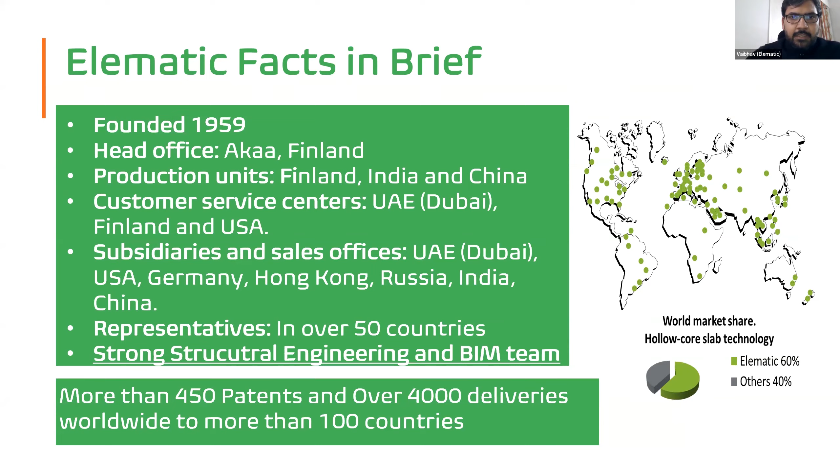So as Elematic, we are not just selling the construction technology, but we are providing the precast solution to the customer, which starts from the building design. Then we are doing the precast plant design, like what kind of precast machinery is required, what area of plant is required, and what kind of stockyard is required. So all this related information in the design we are doing. And then definitely we supply the precast machinery. The machinery can have low automation, mid-size automation, or very high automation as per the customer requirements. So those kinds of precast mold and machinery we supply.

Then we have a team who is also setting up the plant. And after setting up the precast plant, when it is operational, we are also helping the customer further with respect to concrete mix design, precast element production, stockyard management, and installation. So as Elematic in India, we are providing total precast solution, right from concept design till the execution of the project, more of a hand-holding support.

We have a complete project support team, 40 plus people in the design team, who are a combination of structure engineers and BIM professionals. They are doing a lot of precast building design and other design as well, where it is a combination of precast, cast in situ or steel structure. Then we have our service engineers team, and we also have our plant that is based in Alwar, from where we are doing all the mold supply from India. So all the molds for column, beam, and tables and other kinds of molds for precast elements are all manufactured in India.

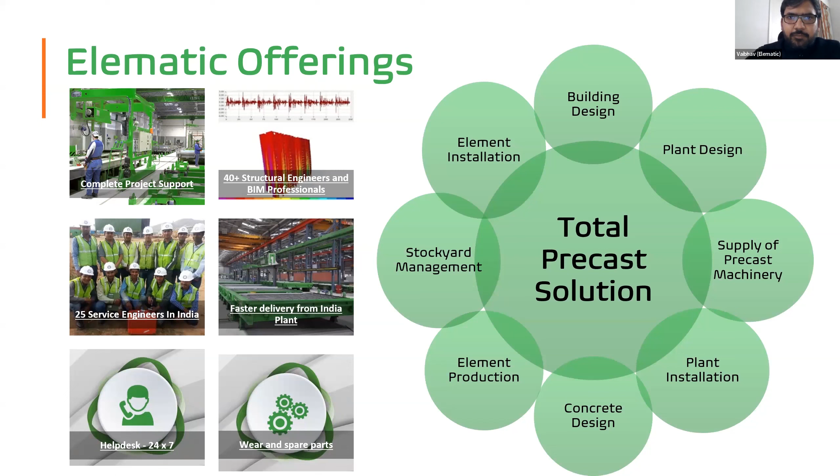So in India, we have engineering and BIM offices in Gurgaon, Pune, and Hyderabad. In Gurgaon we have the office; in Pune and Hyderabad, we have a team who are working from home. So we have presence of the design team in these 3 locations. Marketing presence as well in Delhi, Bangalore, and Hyderabad, and that way we are able to cover across India. The plant is based in Alwar, Rajasthan. And our service team and supervision team is stationed in Delhi and Pune.

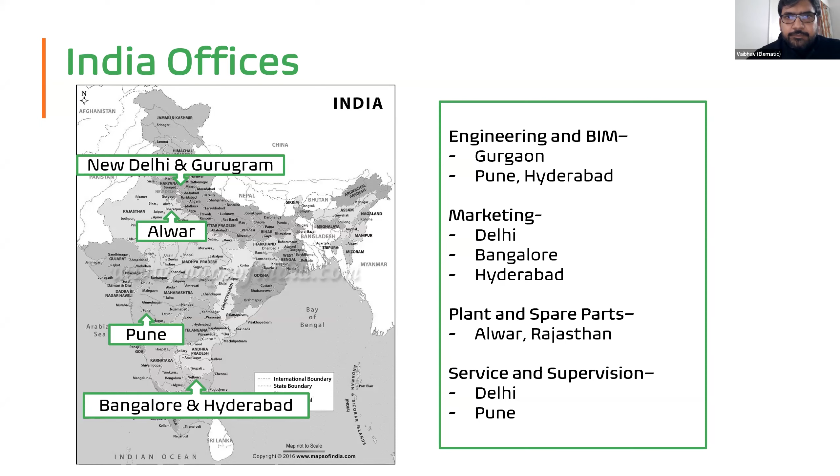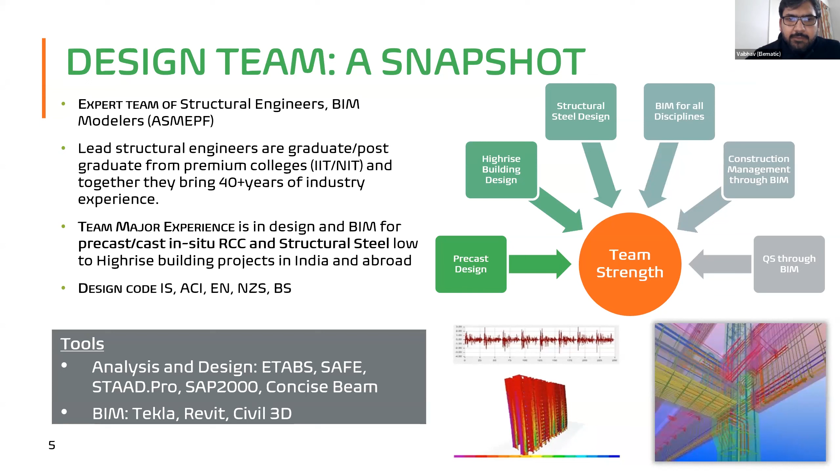So as a design team, the strength: for any building to be a good design, to adopt the technology in the right way, it is important to have a strong structural engineering team behind it. Our design team, who are mainly lead structural engineers, are all graduates and postgraduates from premium colleges like IIT. Together we bring 40 plus years of industry experience, especially in precast. That's how we are able to serve the customer. Our team is doing Indian projects as well as overseas assignments, and we are all equipped with the latest technology and software licenses.

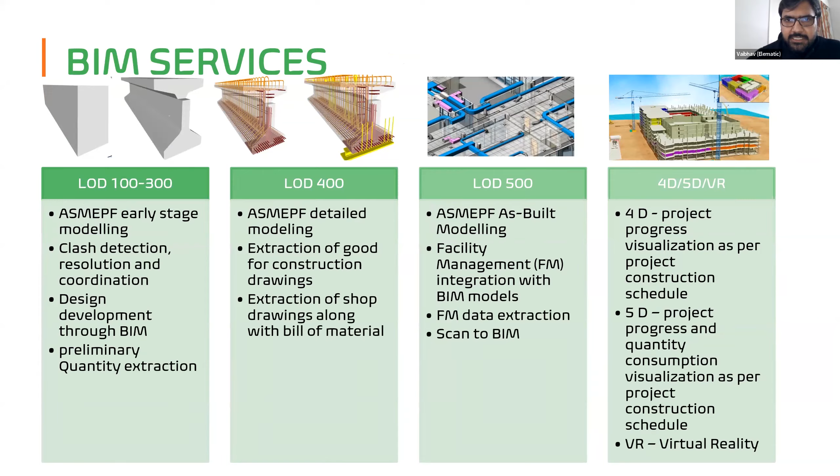So we are doing precast design services and BIM services. Other than precast, we also provide BIM services for the project. So that was a brief about the company, what we are doing and how we can support our customer. I'll come to the precast solution that is available and how anybody can adopt precast for the project.

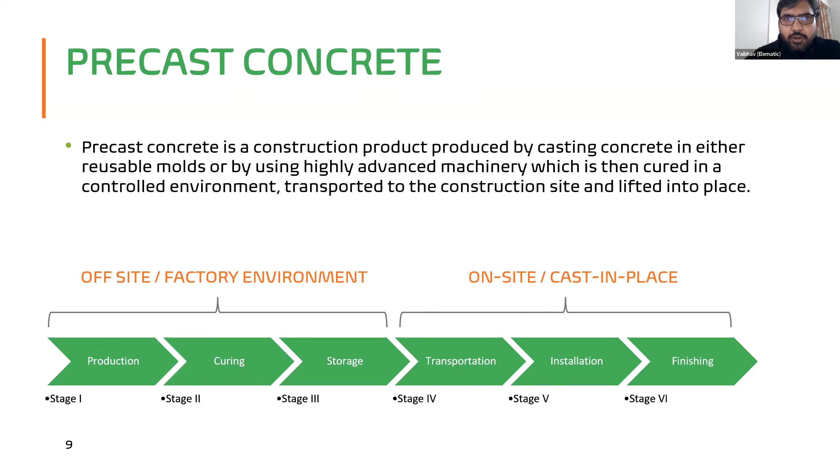So let's understand precast concrete. Precast is offsite manufacturing. Broadly, we can divide this activity in two ways: one is offsite, the other is onsite. In offsite, we are producing all the elements for the building. These are all load-bearing members: column, beam, slab, staircase, wall, all produced in the offsite setup, that is your precast plant. You're producing those elements there, curing them there itself and storing them for some time. Afterwards, you're transporting those elements to the site, the installation is done through cranes, and then the building is finished. So these 6 stages are involved in precast construction.

Now, typically this question always comes to mind: are there any limitations with respect to precast? I would say there are no limitations in terms of what kind of project it is, whether it is residential, commercial or industrial, mid-rise, high-rise, or public works. We have been seeing this for more than 10 years now in all the metro projects, where it's already being utilized. So precast has no limitation. It's all about what kind of plant setup and capacity you have, what crane capacity you have at site, and the logistics part. As long as these 3 things are taken care of, you can do practically any building with precast, because in terms of engineering, we can design any building with precast. All the connections can be designed accordingly, and any project can be done with this technology.

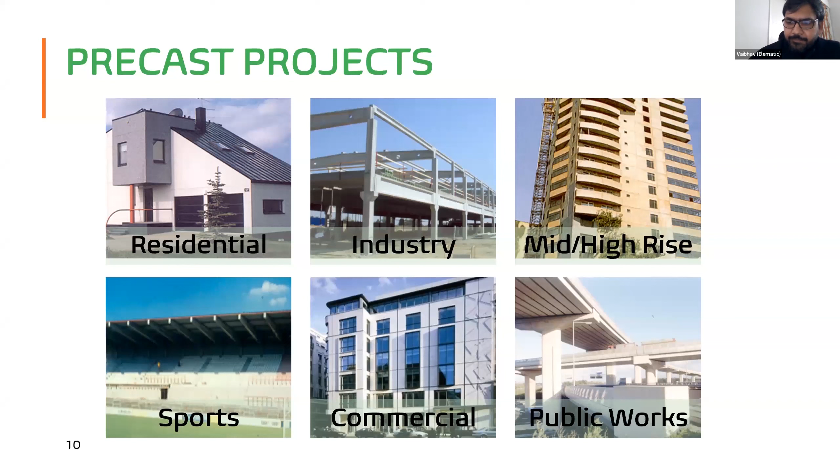So moving forward, if we divide projects, we can simply say there are residential and non-residential projects. We make this differentiation because in residential projects there are a lot of walls, a lot of infill walls. That's what makes them a different type of design solution, because we want to take advantage of those walls as load-bearing members. Rather than going with a column-beam-slab system, we can make the same infill walls load-bearing members, and at the same time they also act as partitions. So in all residential projects, the suitable precast system is load-bearing precast walls, precast slabs, and staircases. Mainly, you only need these 3 elements to do a residential building in precast.

And the facade of the residential building, that is also one of the characteristics of a residential building: you have to have a facade which doesn't require too much maintenance over a period of time, because after 5 or 6 years, you see conventionally in some projects that plaster is falling off, or some kind of paint has gone bad. So you have to repaint, you have to do a lot of repair work. So these facade elements can be done as an inherent part of the precast element.

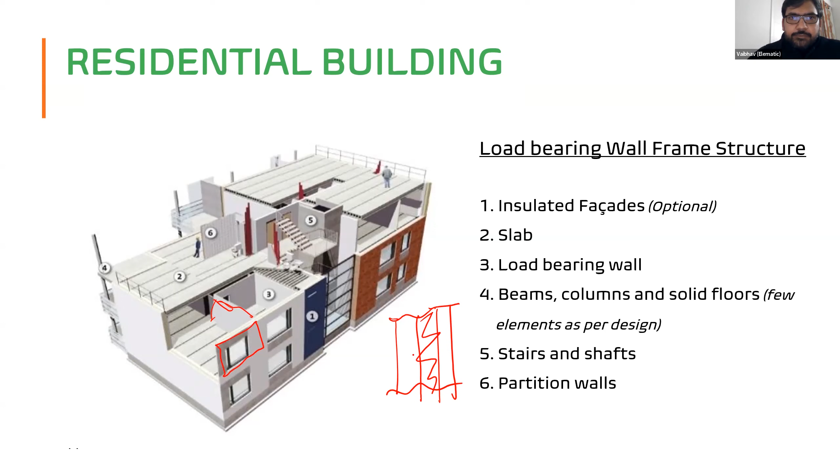One more point with respect to residential buildings: especially in areas where there is a lot of temperature variation throughout the year and you want to maintain a comfortable temperature inside the house, with precast you can also have insulated walls in the facade, with a load-bearing wall on the inside, then some insulation, and then a facade element outside. We call this a sandwich wall panel, which can also be implemented in residential projects. That will define energy-saving homes, where you are able to maintain a good temperature inside the apartment while outside it can be higher or lower. So that was about residential.

Now, non-residential buildings are about column-beam structures. If I talk about an office building, you see that typically the column-to-column span varies from around 8 meters to probably 11 meters or more. That is the trend in all commercial and office buildings. So for this kind of architectural requirement, we go with the precast column, beam and slab system, where one solution is that I can provide the lateral support against earthquake and wind forces through the central core, or wherever I have walls available. Generally in a commercial building, you will have a lift core and staircase core walls, and those walls will take care of all the lateral load resistance for the building.

And I can design my column-beam system where the column is precast, the beam can be precast pre-stressed, and then I can have the hollow core slab again spanning 8 to 11 meters or more as per the project requirement. So the slab, beam and column system would be purely designed for gravity load transfer. And for lateral load, I am able to take care of 100% of the lateral load by the central core or by all the shear walls available in the project. So structurally speaking, in terms of how the flow of forces happens, on top of the hollow core slab we'll have RCC topping.

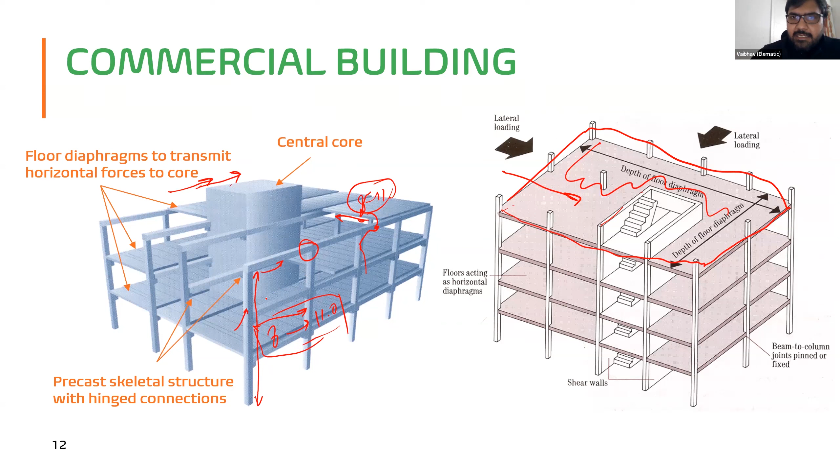precast buildings. So in case of a commercial building, this is the solution we can go with: a precast column, beam, hollow core slab, and the central core, or wherever the shear walls are available. Now, when the building is low rise, I can even have a multi-story precast column, and that will further speed up construction. So those kinds of things are taken care of as a project-specific scenario.

Now, another type of building, other than residential, non-residential, we can say industrial buildings. There has been a lot of demand for these kinds of projects, like a warehouse project or a factory project. Typically, these are being done with PEB structure in steel, and the pure reason to go with steel is speed of construction.

Even those kinds of buildings are actually single story, but their characteristic is that they have a 10 to 12 meter high single column. And when we want to do it with conventional cast in situ, obviously the formwork and everything becomes too complicated, and we are not able to achieve the speed of construction. But these kinds of buildings can be very well done with a precast solution.

So one solution is that we do 100% precast right from foundation till the roof, and there could be two ways of doing it. One is that I can have the perimeter of the warehouse or industrial building with the load bearing wall. Below, I can have a precast foundation, pedestal and beam kind of structure, or I can have a precast strip footing divided in pieces, and then I can start my pedestal wall, and from there the load bearing wall. And internally I'll have a column beam structure with whatever span is required. Generally this span can be around 16 meters or so. So this kind of precast system we can adopt.

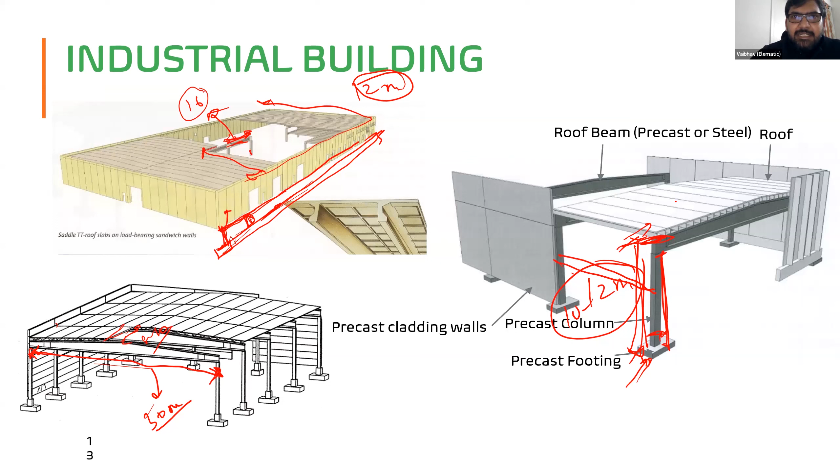So typically, if you see, we have talked about all kinds of building projects, and you'll see that in all the building projects, my type of element is only 5, so to say. One is the slab, other is column, then we have beam and wall and staircase. So you just need 5 elements. And the precast factories are not really project specific, because this is also sometimes a notion: do I have a factory only set up for a project? The answer is no. So you can utilize your factory for any kind of building project. Eventually, you're going to use these 5 elements.

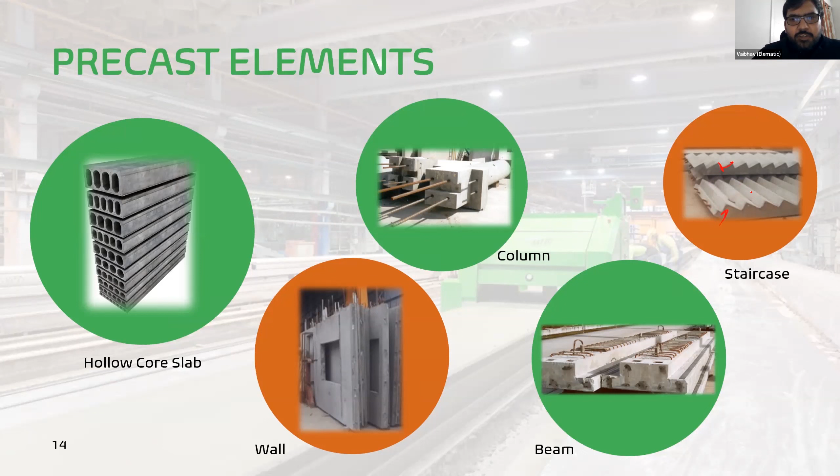And these 5 elements' molds are quite flexible. And this flexibility allows utilization of the same molds for various kinds of projects and various sizes of buildings and elements. There might be some restrictions, like with respect to staircase, you might say that this tread and riser I have to fix, but the number of steps can be variable. So those kinds of slight limitations would be there, which have to be thought through. Otherwise, there is a lot of flexibility.

Now, with respect to slab solutions, we typically can divide precast slab solutions in 4 parts. One is the hollow core slab, which I would say is the most advanced slab solution till date. This is basically a pre-stressed concrete, and it's a product where we have removed the concrete. It's a hollow slab, so we have removed the concrete where it's not really required in a slab. So we are making the slab lightweight, minimizing the concrete consumption as well as the steel consumption with the pre-stressing. So hollow core slab is a wonderful product which can be utilized anywhere.

Then we have a double T slab. Double T slab is, I would say, a combination of a thin slab with 2 beams, as you can see. This is also again a pre-stressed product and can cater to up to 30 to 40 meter span as well. Then another solution is the half slab. Now, the half slab can be a normal reinforced half slab, or it can also be a pre-stressed half slab. And you can consider it as half precast and half cast in situ, which is done at site. So this bottom precast portion also acts as a formwork. So we have to just place some props below the slab while we are doing the balance cast in situ half at site.

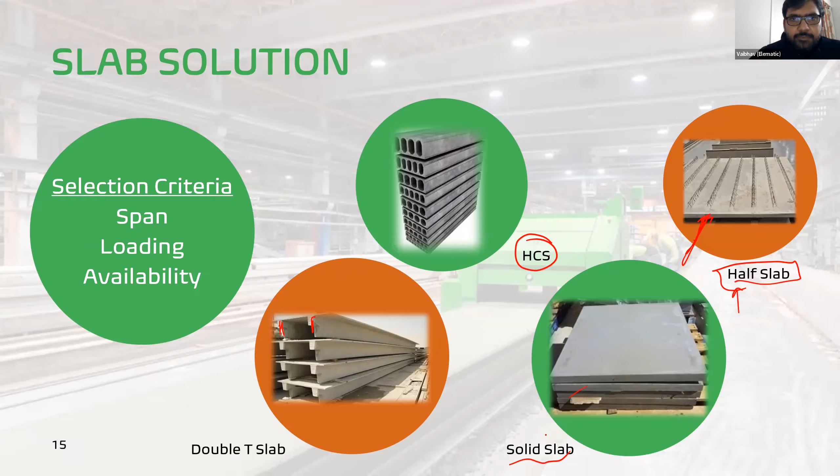So this was all about the structural scheme, the kind of precast elements that are required. Now I'll touch upon the connection part, because that is also quite a common question in everybody's mind, how these connections are and how they will behave. So first of all, before I get into this in detail, I want to explain that all these connections we use are tested connections in laboratory. They have been tested in the US, in New Zealand. Most of the connections are now also being tested in India.

And it has been found that the performance is either equal or better than the cast in situ construction. So all these connections, if I really divide these connections in terms of their load transfer capacity, we can term them as a moment connection or as a hinge connection. And accordingly, as per the analysis of the building, we have to see the amount of forces that is coming, and accordingly, we have to design these connections.

But in terms of detailing, these detailings are quite well known, and they are given in the literatures, in the code driven thing as well, and that's how it's being followed. And these have been tested.

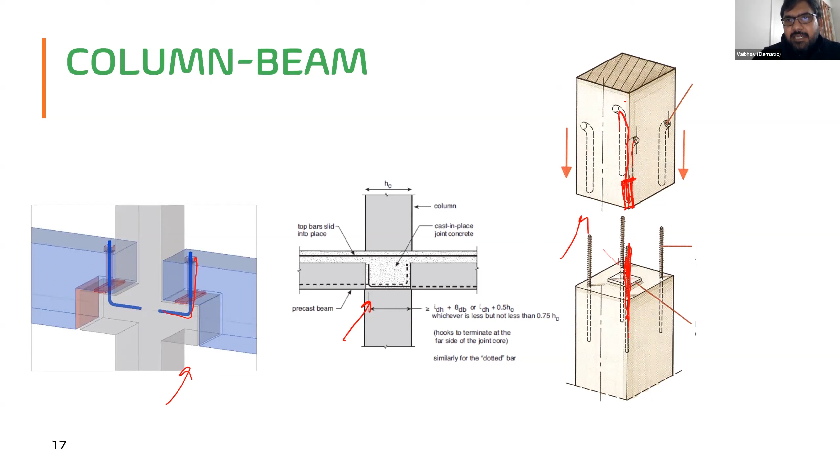Now this can also be replaced with a grout-based coupler where I can have again similar dowel reinforcement coming out from the column below. Then we'll have a grout-based coupler, and then we can have a bar starting again. So these are column connection details.

Then the wall to slab connection is also similar to what we have seen in column to column connection, that there would be reinforcement coming out from the wall below, and it goes inside the dowel tube above. And also at the same time, we have to basically connect my wall with the slab diaphragm.

So in all the slab solutions, especially with respect to any structure which is more than 3-story, we have to have this mandatory RCC topping, which is also mandated by the code. So this RCC topping is also acting as a diaphragm for my floor plate. This diaphragm is connected with the reinforcement coming out from the wall. So there is one reinforcement bent inside the diaphragm, and this is how the slab and wall is connected.

So in this connection detail, if you see, this is an external wall connection. You have a wall to wall connected through this dowel tube system. One reinforcement is bent inside this, and then this gap is filled with the grout, and on the exterior we have to put backer rod and sealant.

So this sealant is basically a protection against any possibility of seepage because of heavy rain and all. So you can see that there's a sealant, then the grouting is done. So these two things really eliminate any possibility of water intrusion.

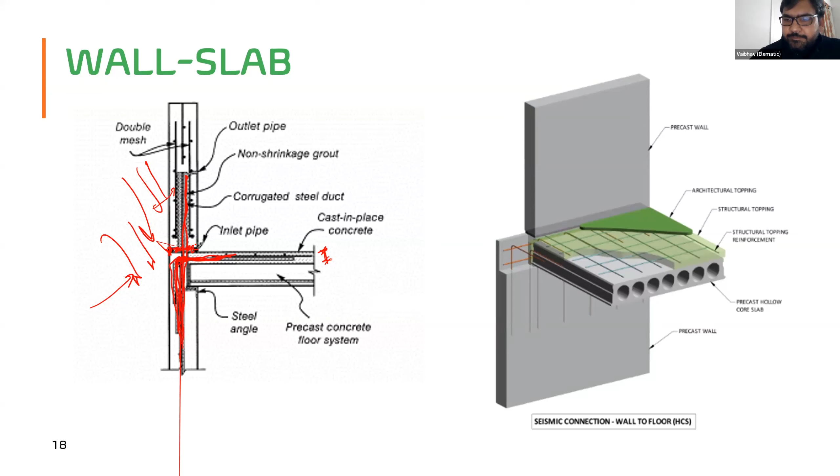Then there are some wall-to-wall connection details. So I can connect these walls together with some kind of a loop connection, or I can also connect a wall to wall with rebar projecting out from both the sides and have more of a stitch connection. So it all depends how the structural engineer is designing and what kind of forces are transferring from one wall to another wall. And accordingly, this junction has to be designed and detailed.

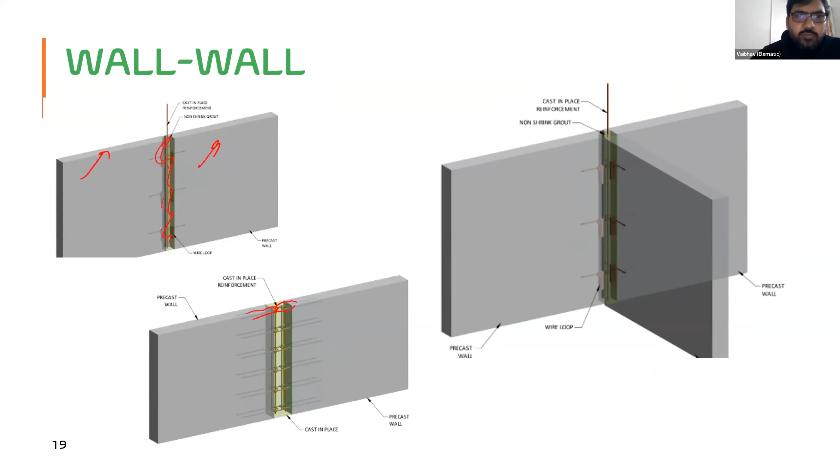Similarly, some beam to slab connection detail, where my slab is resting on the beam, and then there are tie reinforcements provided with respect to longitudinal ties and transverse ties. So the whole purpose of showing these connections to the forum is to understand that all this precast design information and knowledge is available. It's already given in the Indian codes as well.

There are some mandatory requirements which we all have to follow, and that's how we ensure that the building is behaving as good as if it's a cast in situ building, or even better in terms of any kind of lateral load situation, or also the smooth transfer of gravity load.

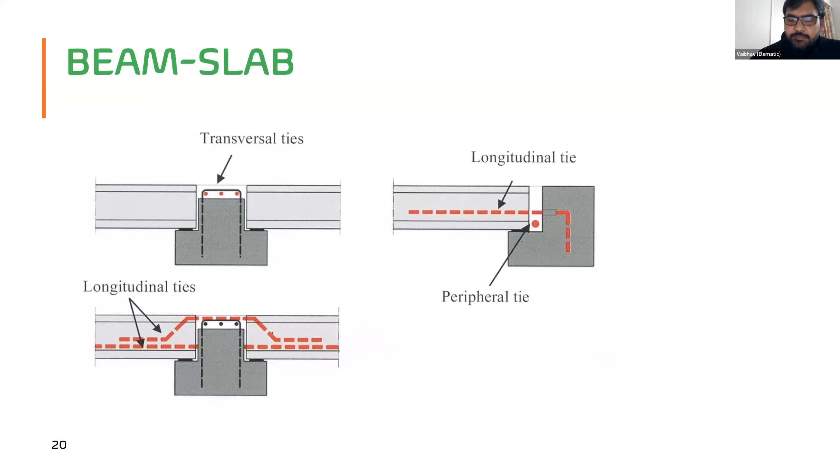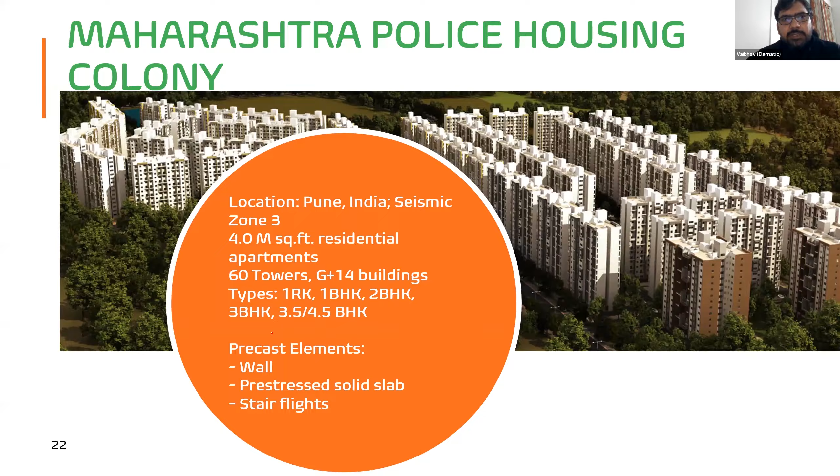So now I'll show you some precast project examples in India. This is one example from Pune, where there are 60 towers, 4 million square feet of residential apartments. You can see photos. It's a Maharashtra Police Housing Colony. Unfortunately, the project is not completed yet because of some issues which are happening with respect to the site.

But otherwise, this is the project photo taken when the project was moving at full speed, and you can see how the construction is happening at site. You can see hardly 10 people at site who are actually doing the installation of the wall. So if I explain the residential precast solution again, this is my load bearing wall, which is being installed here.

And I have this dowel reinforcement coming out, which goes inside the wall panel, and then it's filled with grout. Then this is where I have a one-way precast slab, which you can see in this photo, where the slab is coming and resting on the wall. Then in this entire area, the RCC topping is done. And then you keep repeating the same sequence.

So theoretically, you can achieve a 3-day slab cycle for residential construction, but practically people are able to achieve a 6 to 7 day cycle with precast construction. This is a closer look at that installation.

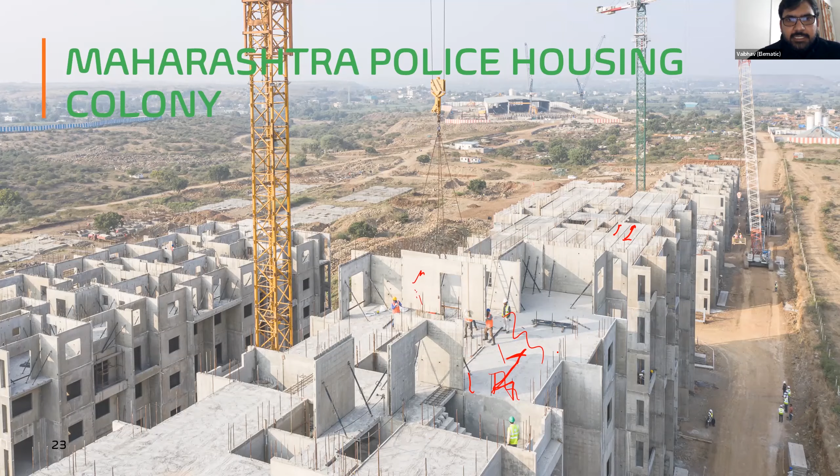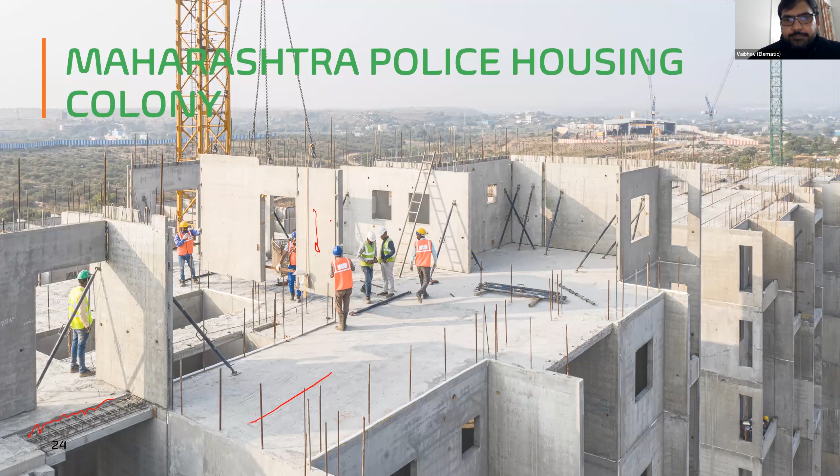All your electrical conduits would be pre-embedded. With respect to floor conduits, we place those in the topping itself. You can see the topping thickness from here. So all your electrical conduits in the floor are embedded inside the topping, and the wall conduits are embedded in the wall. So this was an example for a residential building.

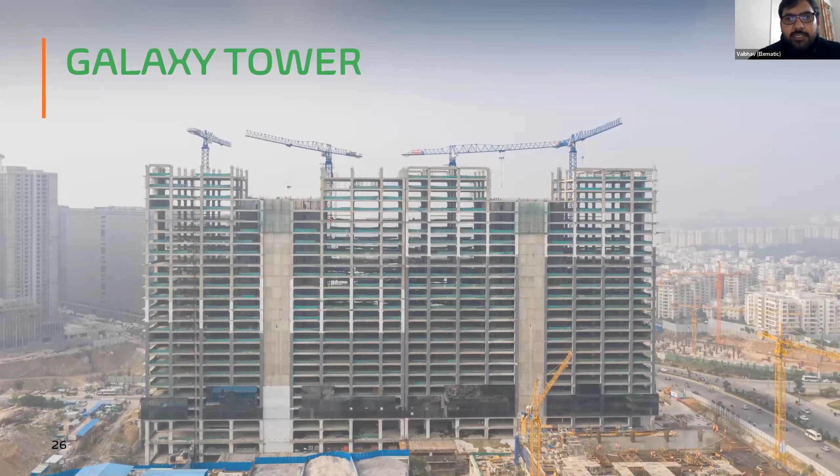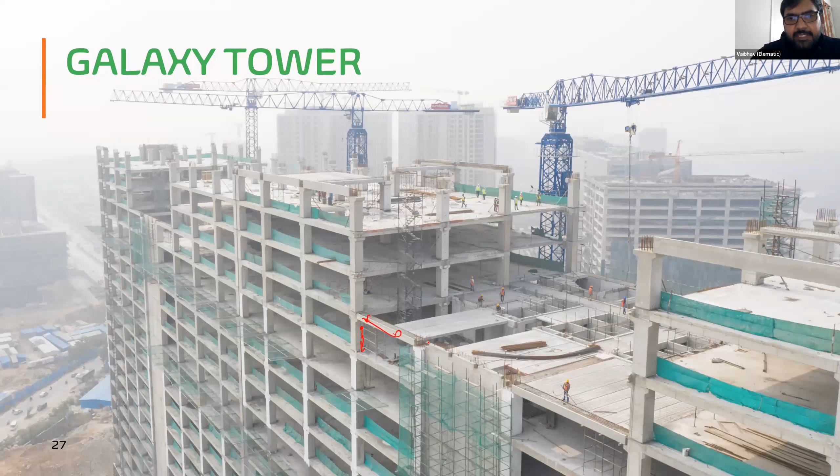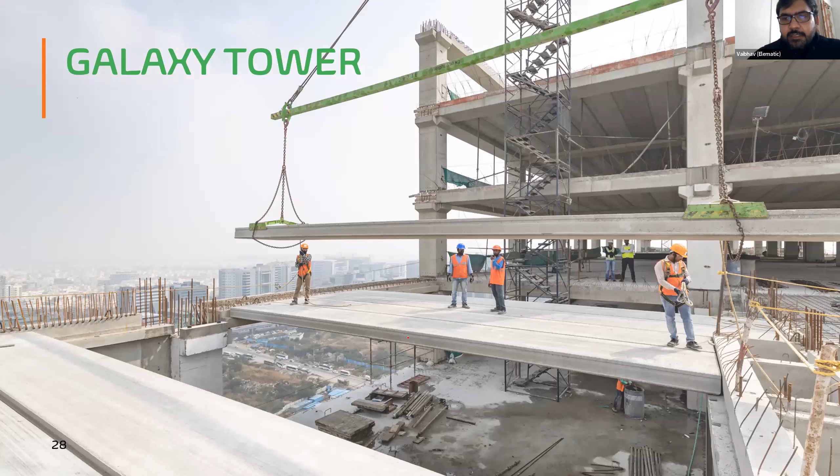This is the Galaxy Tower. This is a finished building. It's leased out and tenants are already utilizing this property. It's a precast column beam structure with single-story precast columns, precast pre-stressed beams, and hollow core slab spanning from beam to beam, and then RCC topping is done on top of it. So this building is already completed.

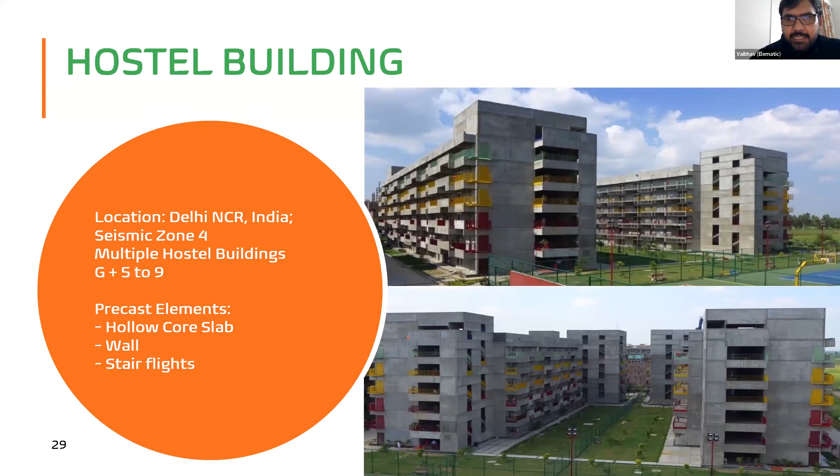Then this residential building is also based on a wall frame structure, where we have used hollow core slab, walls, and stair flights in seismic zone 4, and it has been done up to 9 stories in high seismic areas. The 9 stories were done as per the client's requirement, but it has nothing to do with any limitation on how high we can go.

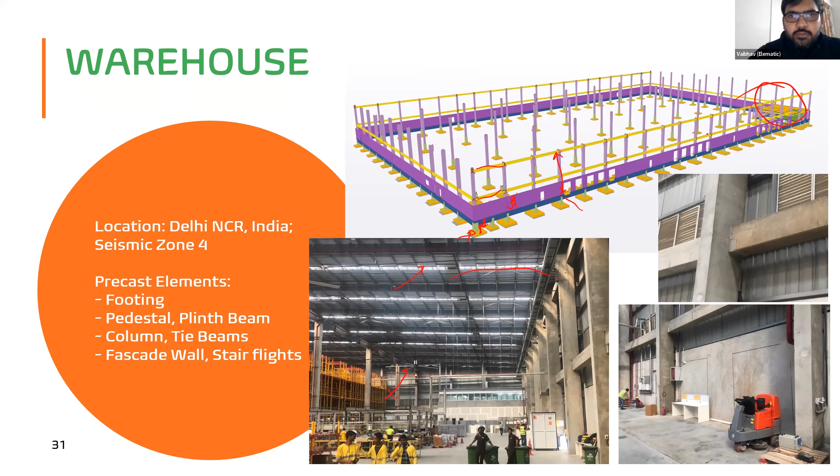So that's all on the precast solution with respect to various buildings. I have one video to showcase before I end my presentation. This will give you a feel for the mechanization of structural elements. So I'm going to run a small video.

It's almost an 8-minute video on how hollow core slab production is done. You'll understand what kind of automation is happening in this kind of element production, which really increases the speed of construction and optimizes your cost of production. This is definitely a revolutionary product.

So first thing is that we are using basically zero slump concrete for hollow core production. In this hollow core slab plant, you have basically a 1.2 meter wide bed, and it's long bed casting, long line casting. So the first process is that this entire long bed, which is basically 120 to 150 meters long, you clean the bed and oil it, and then you start placing the strands.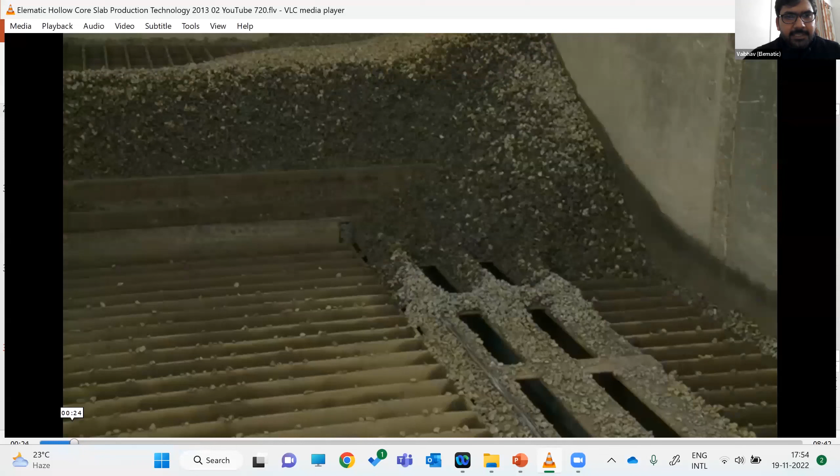You're showing the video now, sir? Yeah. Vaibhav ji? Yes. Video bata rahe na? Ha. You're able to see the video, right? No. Sorry. Mr. Siddharao also said that they can't see any video. I thought you had to show it. When you were talking, there was no video. Just a second. Let me. Now you are able to see the screen? Yeah. Take it back. The starting part, yeah.

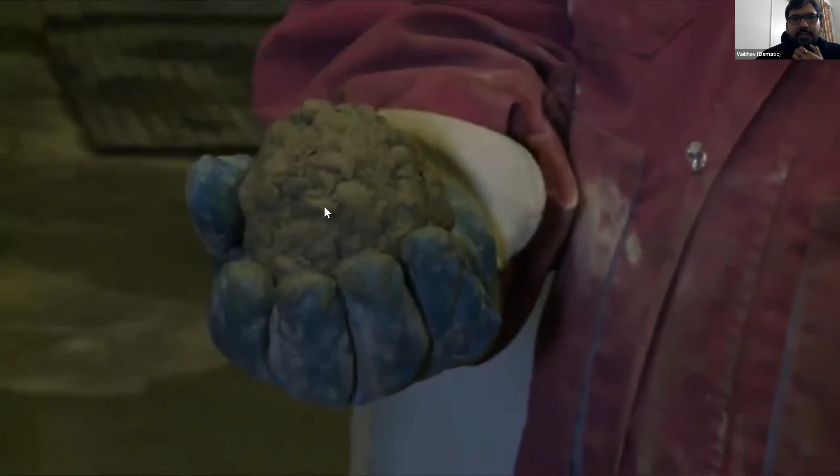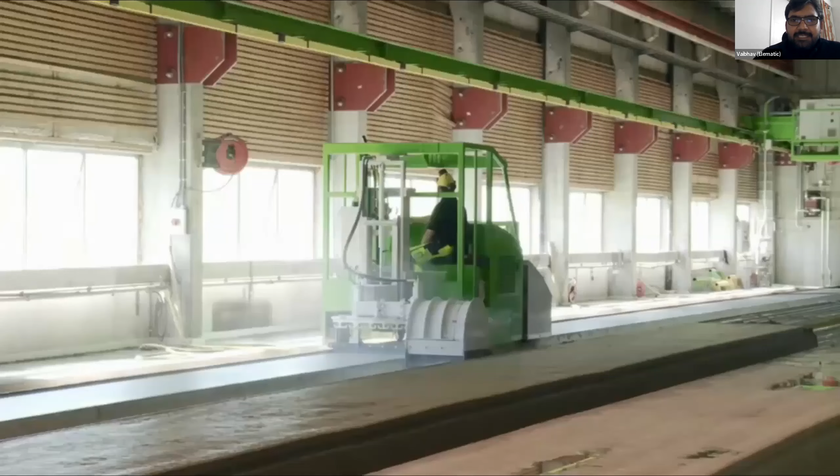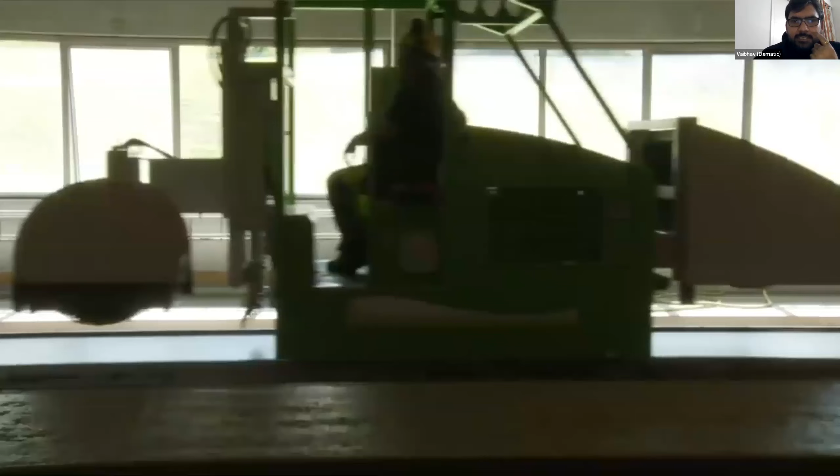Okay. So this is basically zero slump concrete. You can see how this ball is prepared. So it's just showing a zero slump concrete. So I'm saying that this hollow core plant is basically long line casting where the width of the hollow core bed is 1.2 meters. Now this machine is cleaning and oiling the bed, and afterwards pulling the strands. So one person is doing this activity utilizing this machine. We call it a bed master.

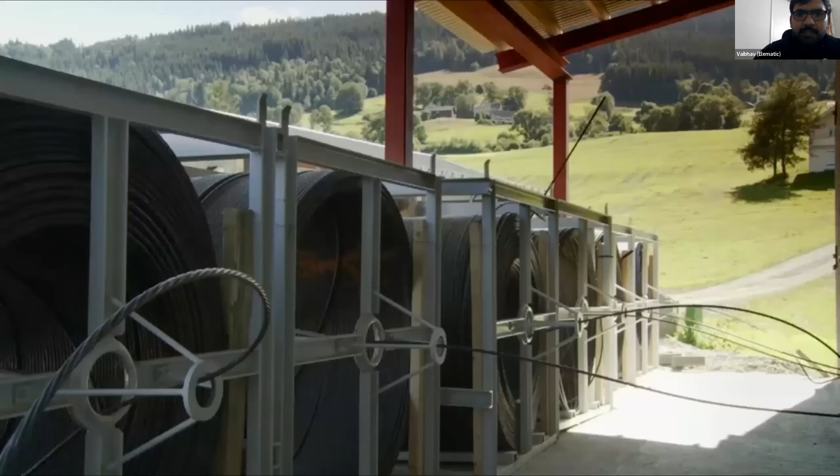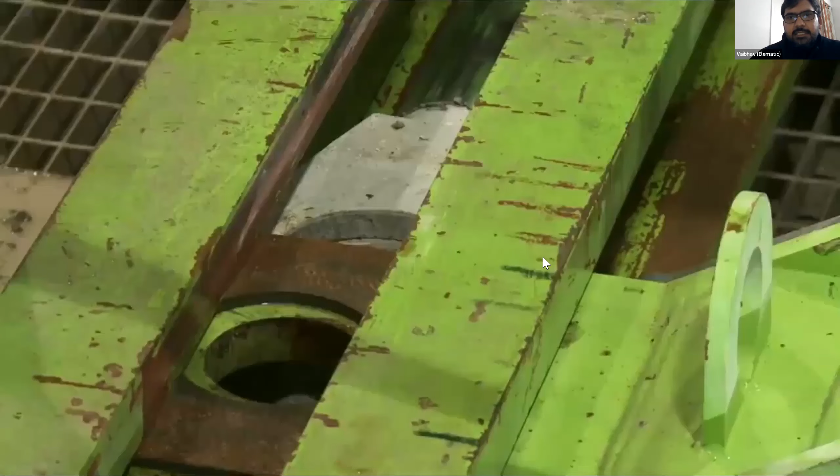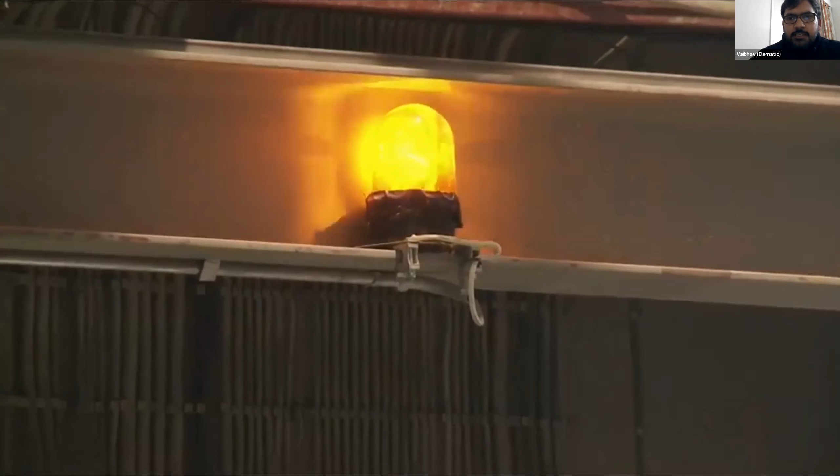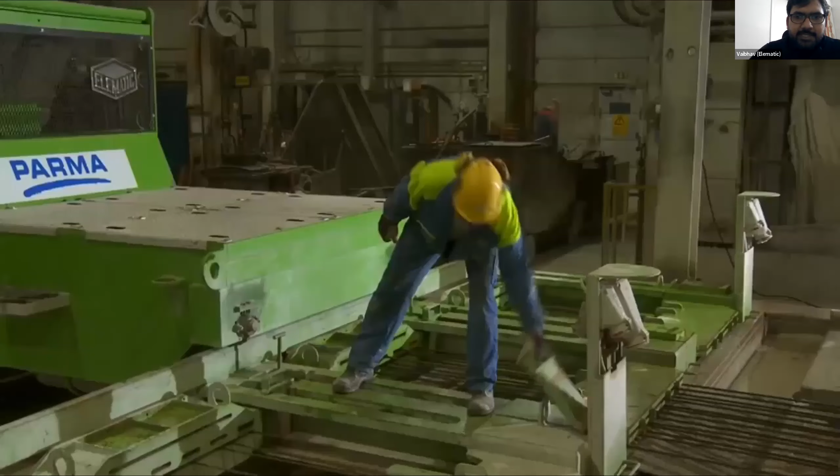So you get the strands in coil form. You're able to stress them. Then we have a multi-stressor, which basically stresses all the strands together. So you have 4 or 5 strands in a hollow core slab width of 1.2 meters, and all these strands are stressed in one go. You don't need to stress them one by one. And then the pre-stressing starts. Once the stressing is done as per the required force, we lock the pre-stressing abutment area.

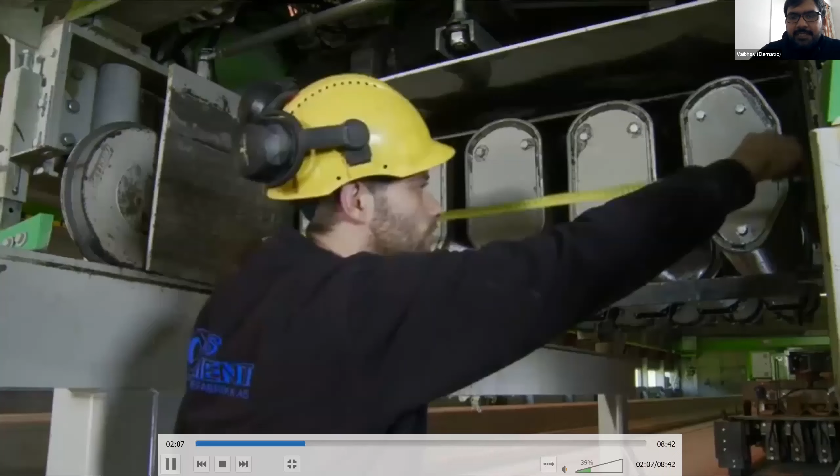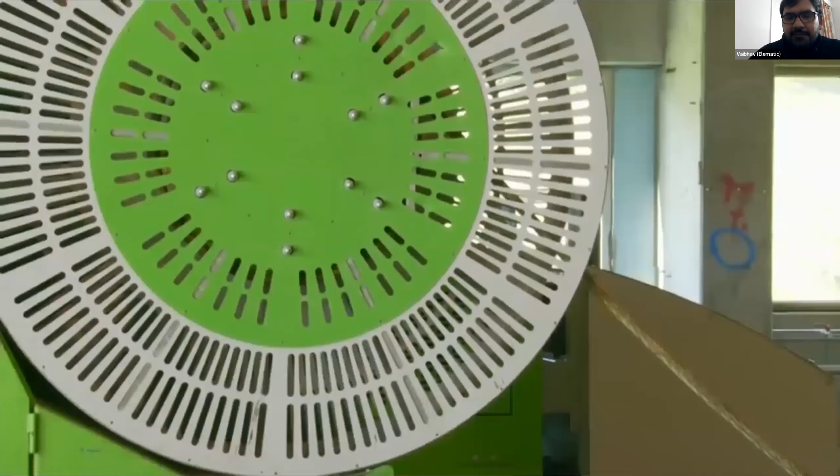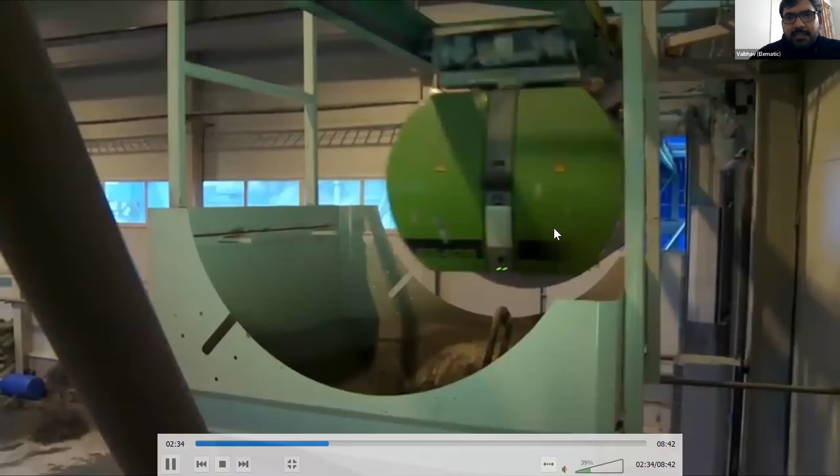Now this is an extruder machine, which will extrude the entire hollow core slab and keep on casting this hollow core slab. It is self-running. Once it starts, it will finish the bed in less than 2 hours. Now this is concrete transportation. From the batch mixing plant, this concrete shuttle has collected the concrete and it's transporting it to the comcaster.

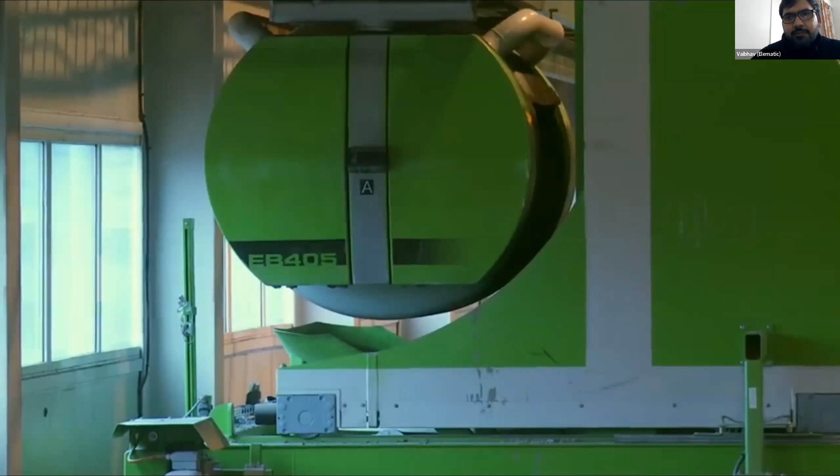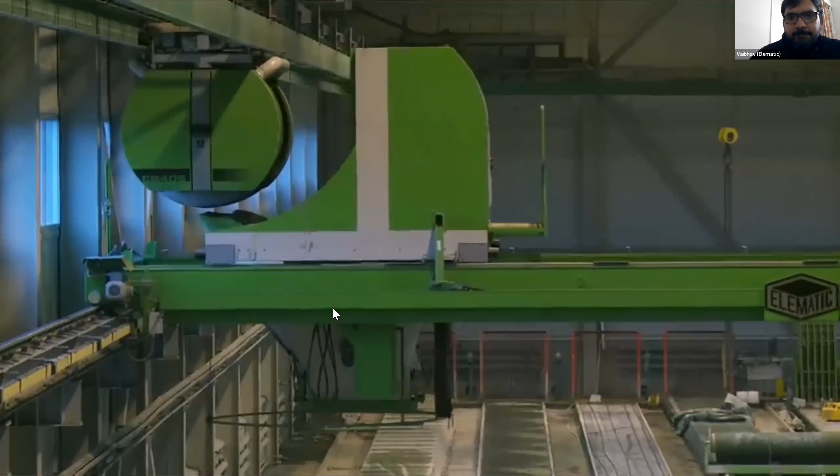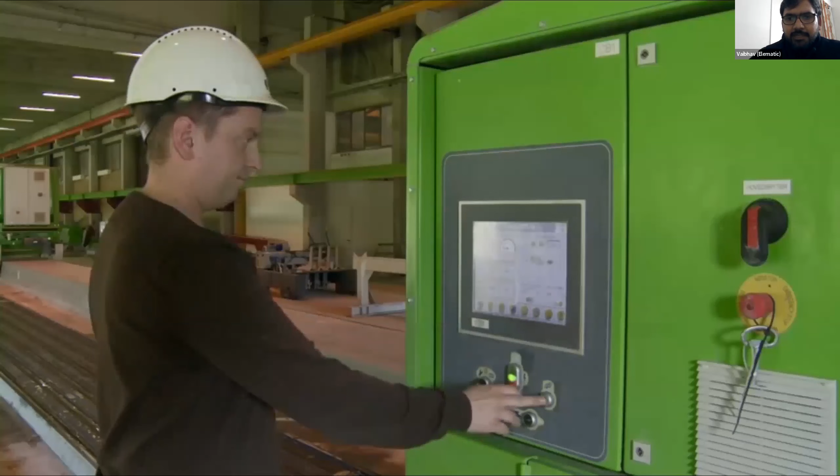Now this is the comcaster, which is distributing the concrete transversely. You can have a number of hollow core beds, and this comcaster is feeding the concrete to the extruder. You can see it going horizontally and feeding the extruder. So there are 3 machines in function: the shuttle, the comcaster, and the extruder. These 3 are all in sync and keep on casting the entire bed without any human intervention.

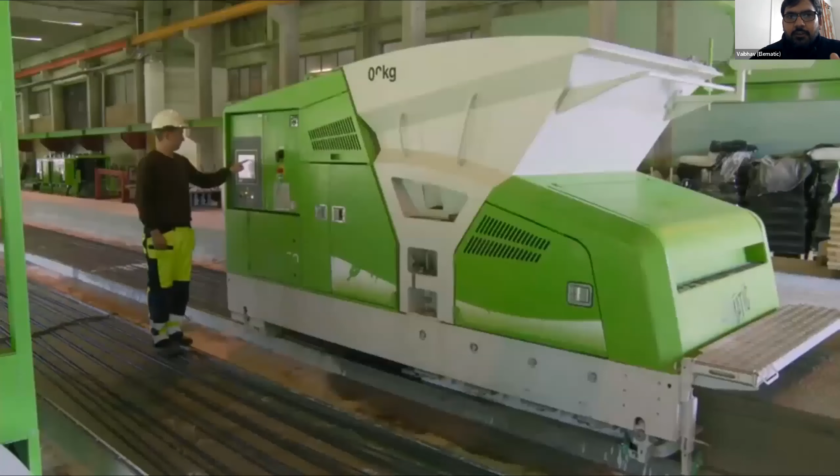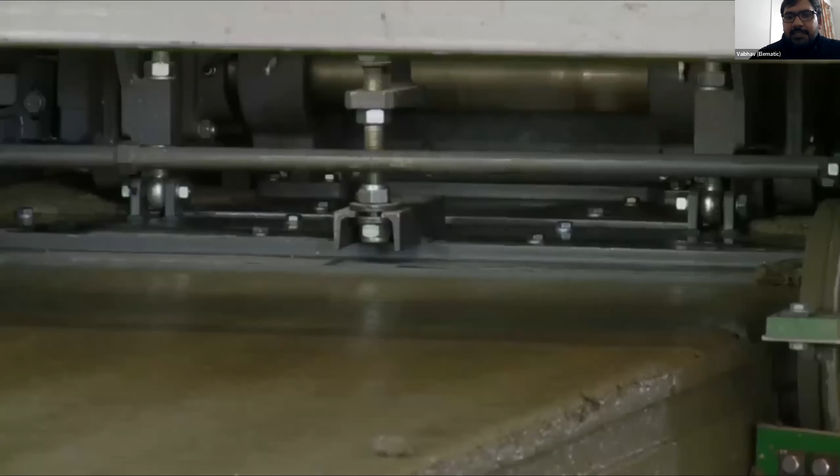So you keep receiving the concrete from the batch mixing plant, and this concrete shuttle syncs with the comcaster. The comcaster moves along with the extruder, and this entire process happens automatically. And you can see the slab coming out of the machine like a ribbon, and it's pre-stressed. This hollow core slab just after extrusion is so strong that somebody can even walk on top of the slab.

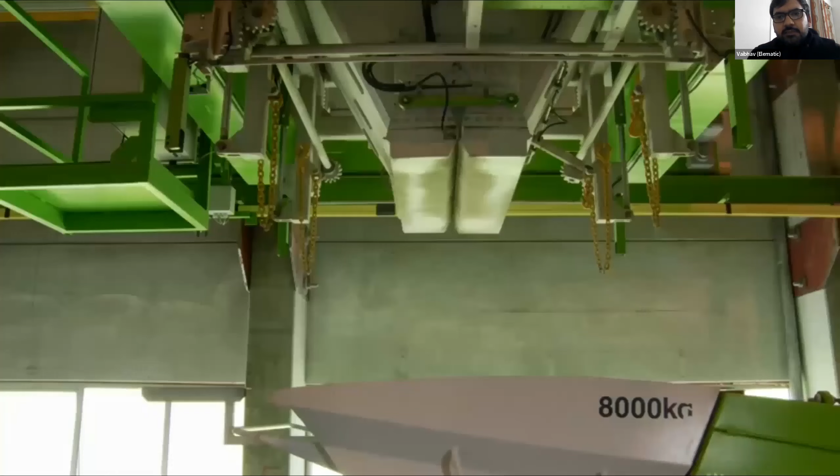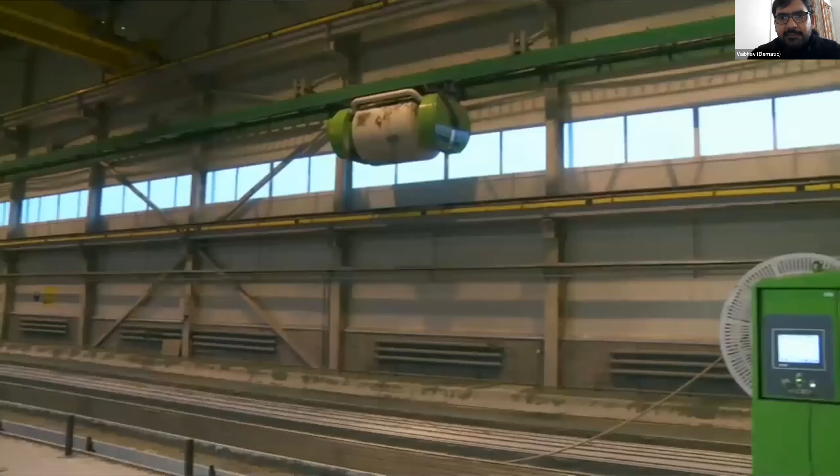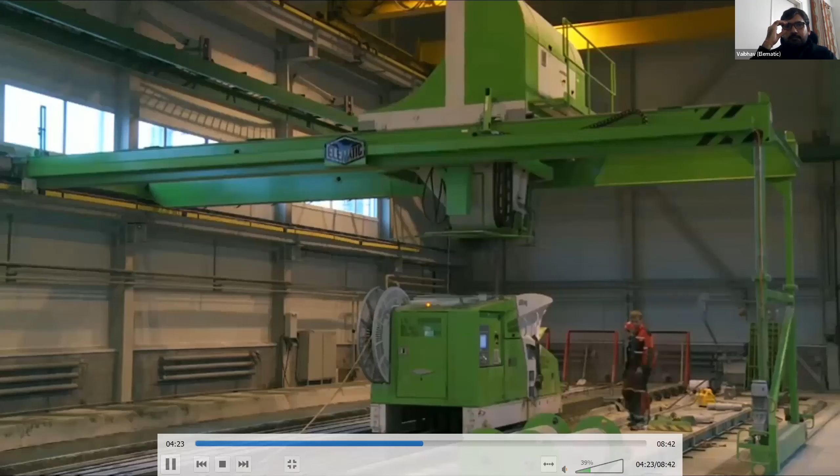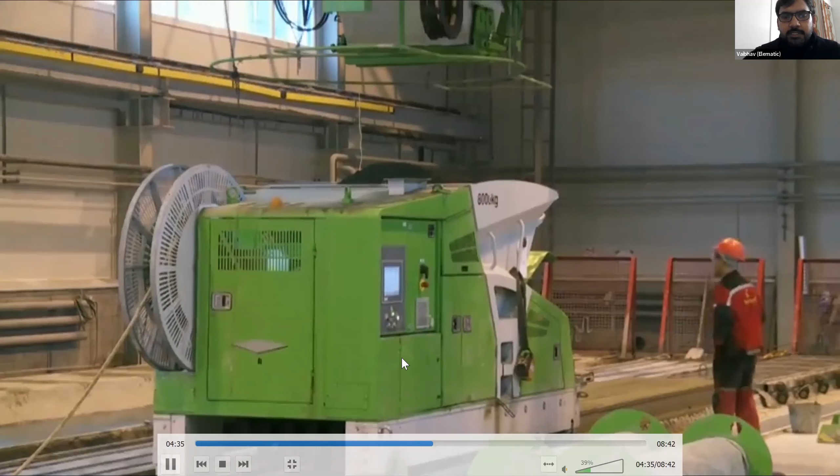So this is how the casting is happening. In less than 2 hours, you're able to cast a 150-meter long bed, and then you can cast the next bed. So basically one extruder can cast, let's say, 6 beds in a 12-hour shift. So this is how the casting is happening.

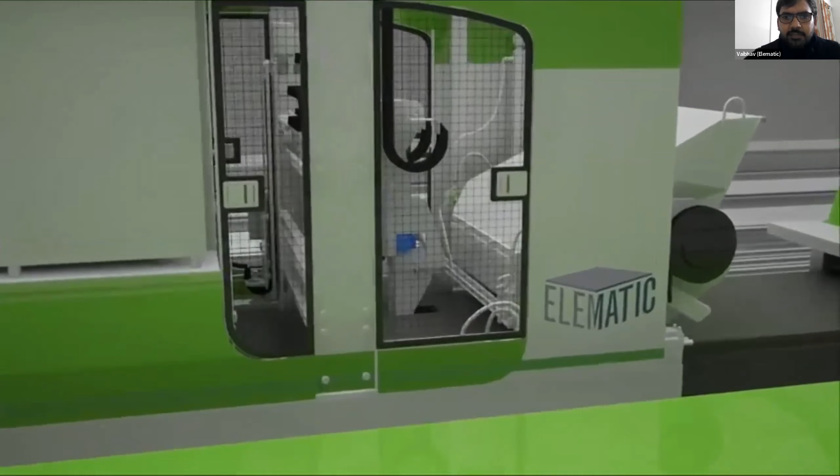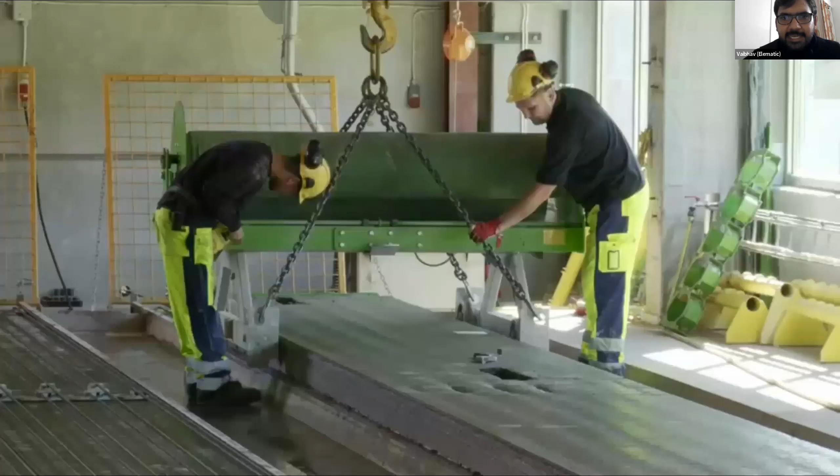Then there's one more machine which can make modifications in the hollow core slab when the concrete is green. Let's say you want to take out a cutout, or as per the drawing, you want to create some modification in the slab. When the concrete is green, this modifier is able to do this, and it can also take the extra concrete back for recycling. Now, once the casting is done, we put the tarpaulin on for curing.

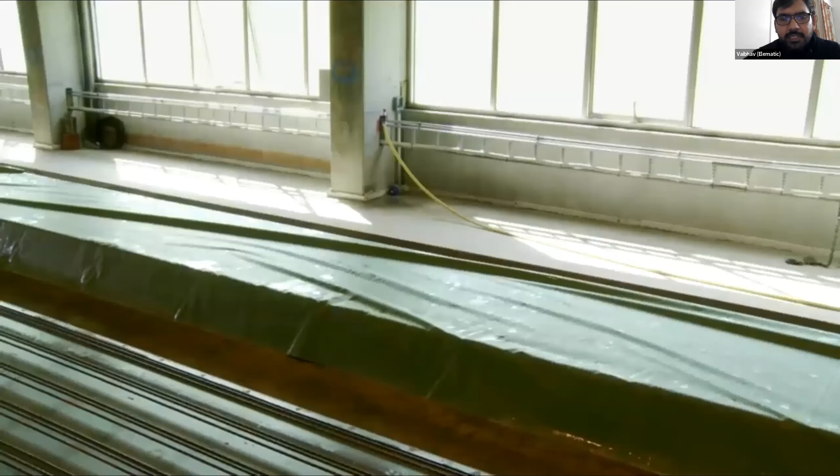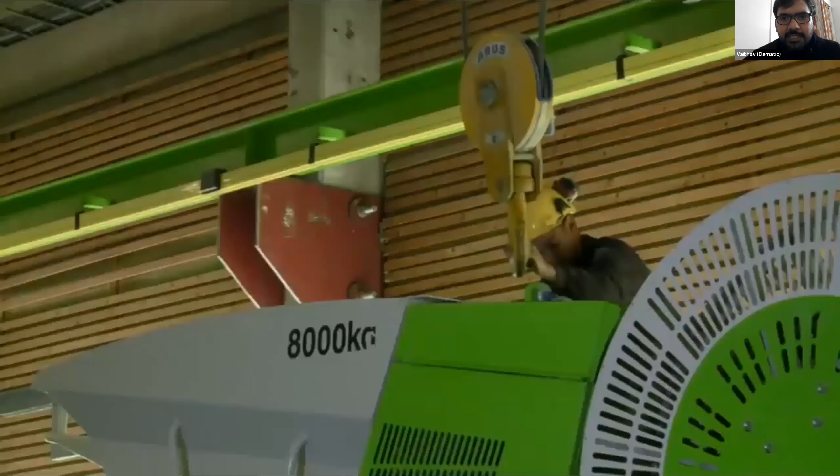Now, this is also very important: for curing, we have hot water circulation below the bed, which really increases the temperature of the concrete. With that heated temperature, we are able to accelerate the curing process, and I'm able to achieve the required strength of 35 MPa in 8 to 10 hours.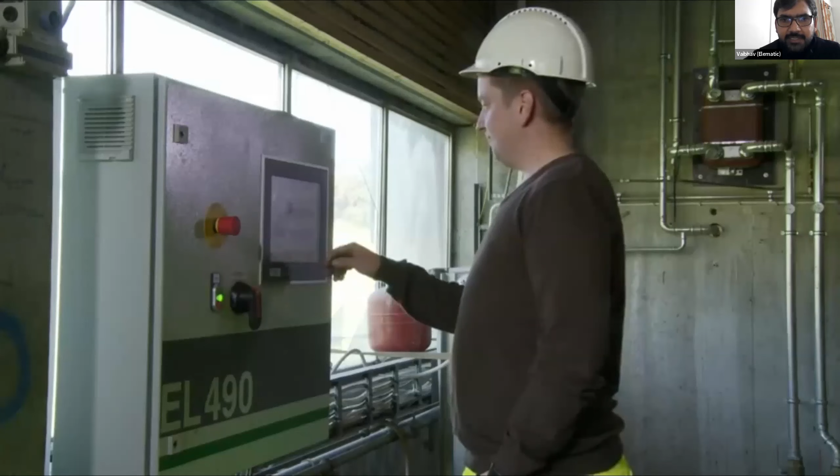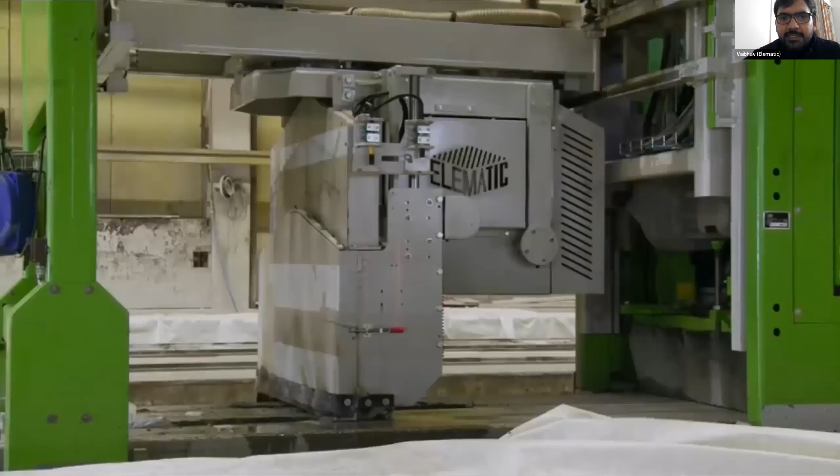Obviously, it all also has to be done with respect to how the concrete mix is designed. But with the heated water circulation, we're able to increase the temperature and do the faster curing. Now, once the curing is completed, we are in a position to cut the slab. So now this slab is cut as per the length requirement. So if I need a 6 meter length or 8 meter length or 4 meter length, obviously as per the design, I'm able to cut this slab.

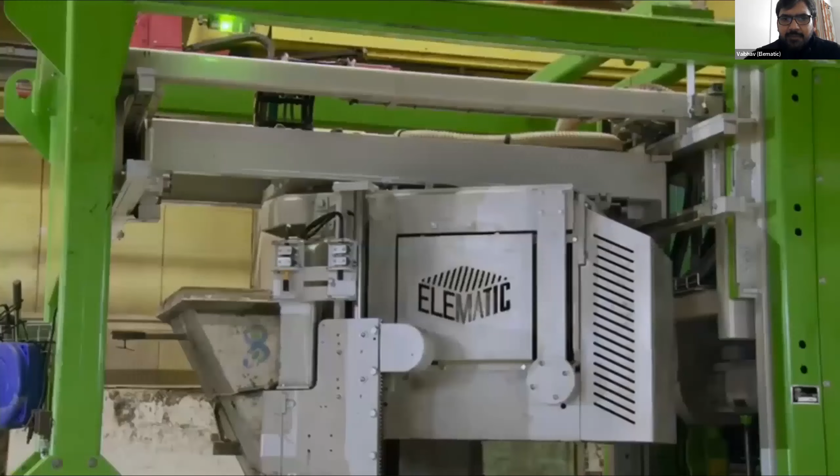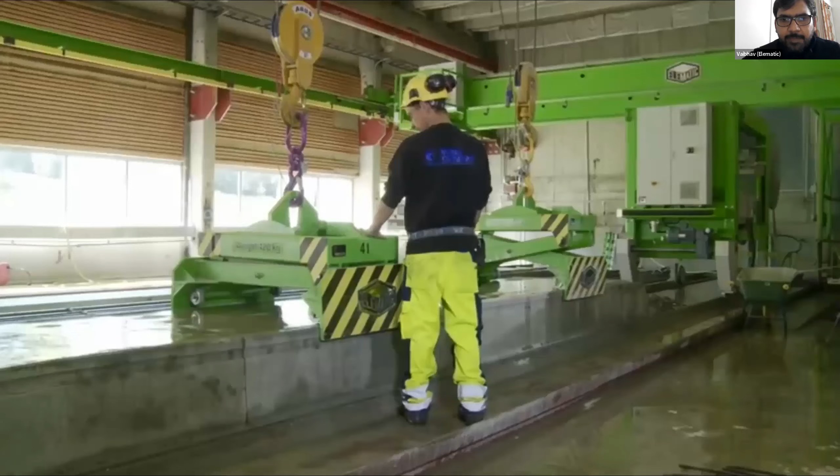This is a 360-degree cut, which can cut the slab in any direction, of any shape. This is the cutting machine. And then after the cutting, you can see that the strands are just flushing with the concrete surface. That shows that there is no slippage in the slab, and then the slab is good to use.

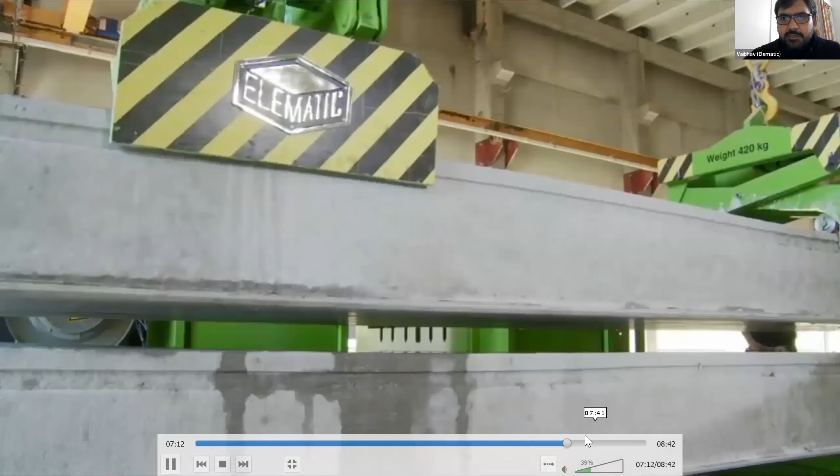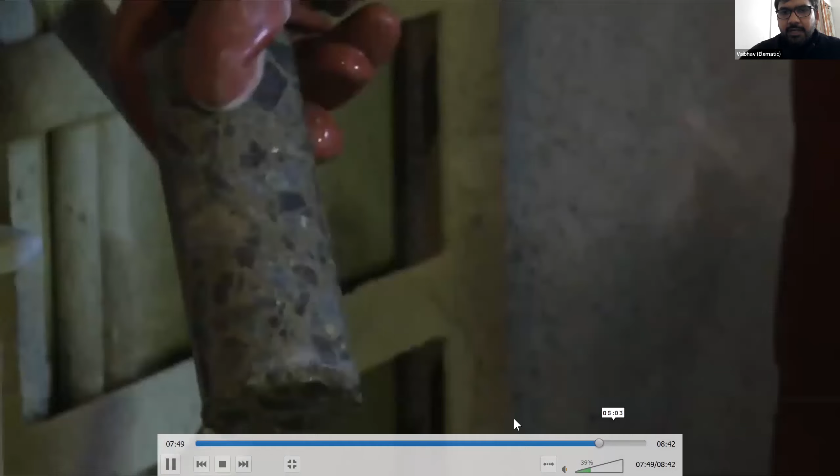So after this cutting, you just take the slab and put it in the element transportation system. So this is my element transportation wagon. On top of it, I just put the slab, and then the slab comes out. For quality check, we can also do the core cut in the slab in some of the samples and check the crushing strength of it. Then we understand what the strength is.

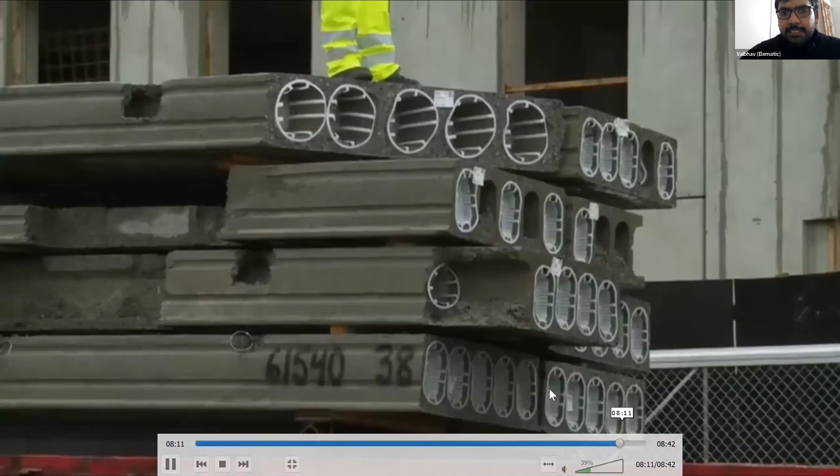And then the slab is utilized for a residential project or commercial project or industrial project, and we just place this kind of stuff. So it's a very versatile product. 1.2 meter width, length can be as per project requirement. And this is easy to transport as well.

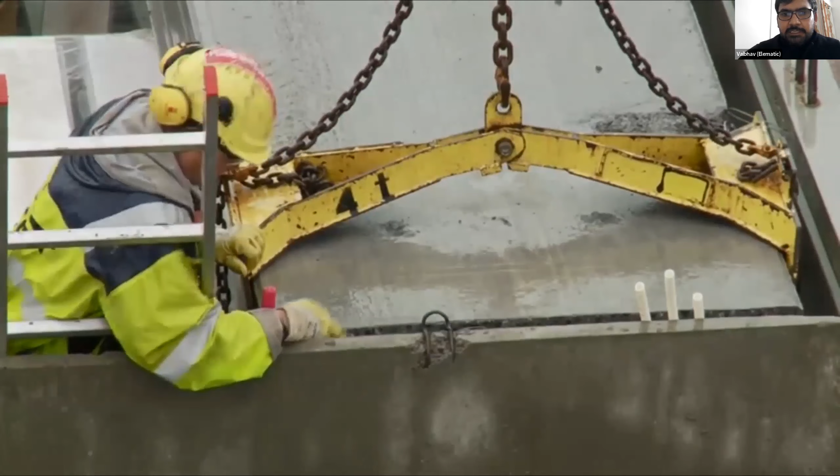And this entire plant only requires 10 to 12 people kind of a staff to produce, I would say, 1 million square feet of slab every year. So that kind of a level of mechanization is possible, and it's already happening in India now, where Elematic itself has supplied more than 35 precast plants, small and big.